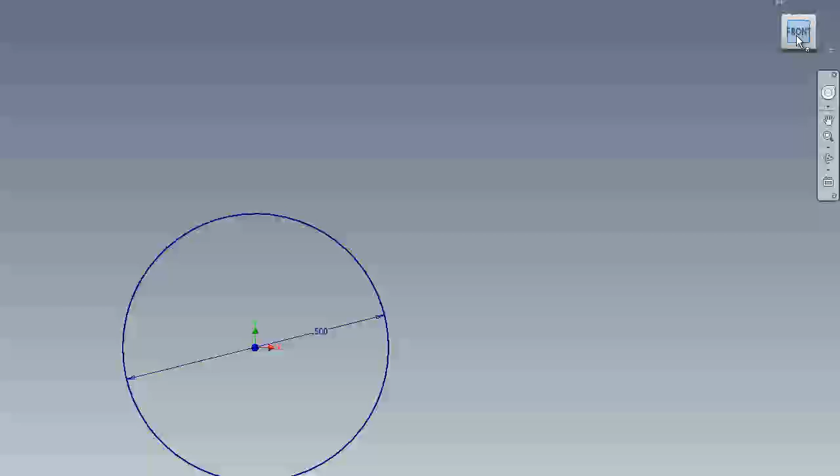First thing I'm going to do is move this. I'm going to right click up here and set that view as my top. Then I'm going to set that view and set it as home.

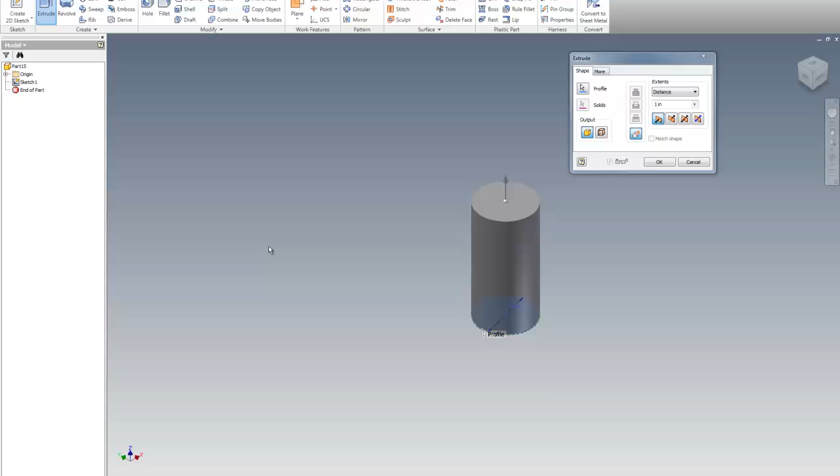So then I'm going to right click and done, right click and finish sketch, and extrude. The amount we're going to extrude is 2.38 minus 0.5 minus 0.12, and I hope that's right.

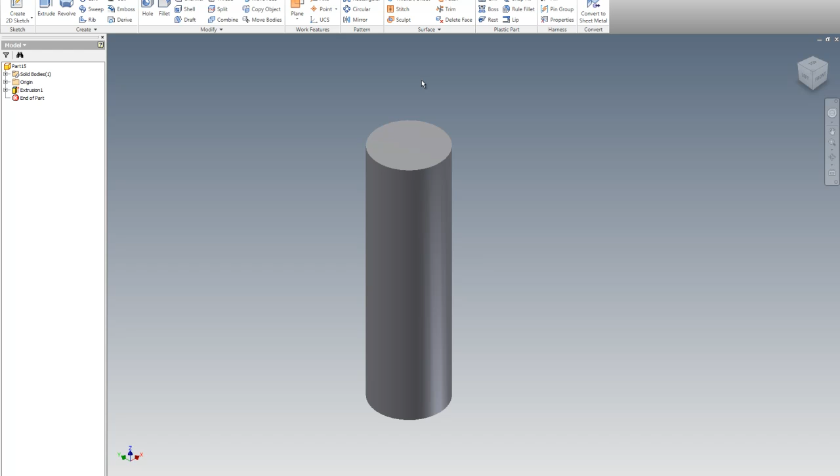Then I'm going to go over here to our origins. I'm going to go to the XZ plane, right click, make it visible. Then the z-axis, make that visible. We're going to right click, new sketch.

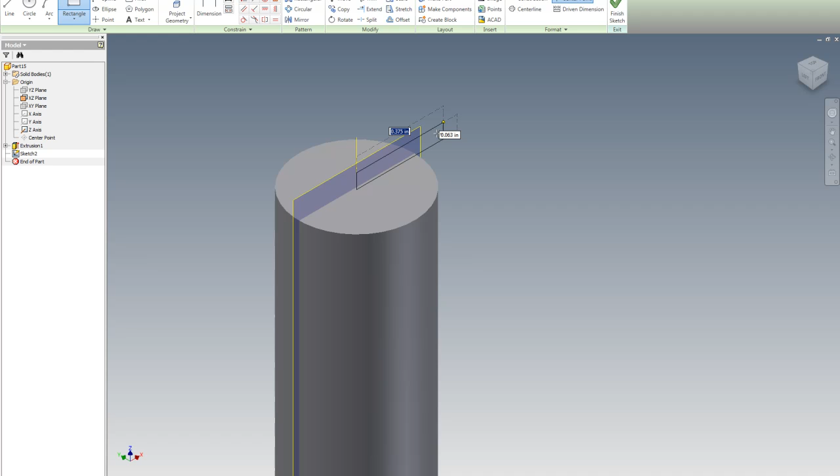We're going to pick this plane right here. Then we'll take this rectangle from that center point, and that is 0.375 tab 0.12. Now notice that it is down.

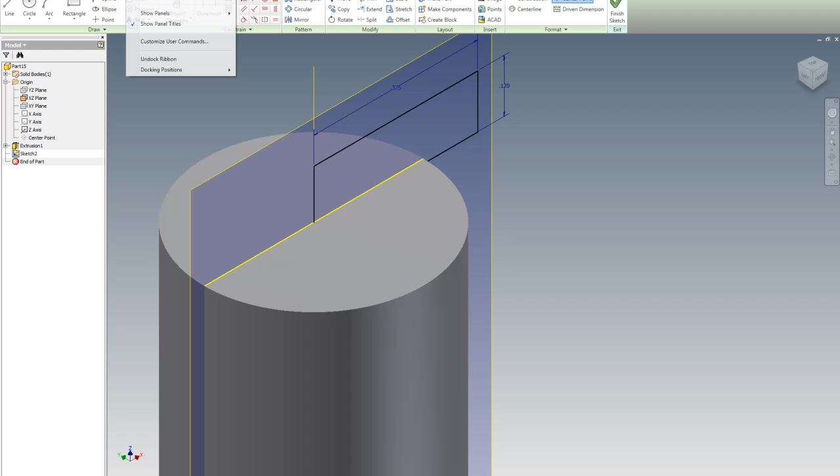So what I'm going to need to do here is project this geometry. Then I'm going to need to move, and I'm going to have to get into my view and go to wireframe to get back here.

Right click, finish sketch. Right click, go back to edit sketch, and go to move. I'm going to select this geometry, pick a base point, pick that point right there, and then bring it up and pick that point right there. And that isn't right where I want it either.

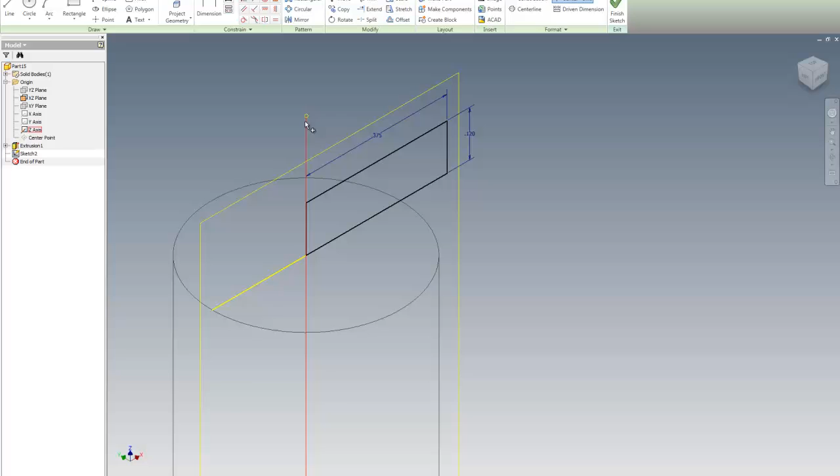So I think I'm going to have to project some more geometry. We'll go one more time, go to move. Select, base point, pick that, and now it'll find that point because I had both of those picked. Done, and just for fun, we are there. Perfect.

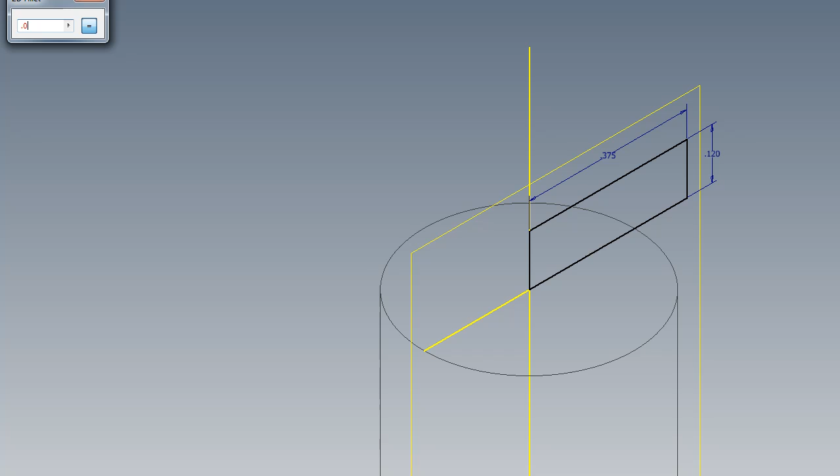Then I'm going to go over here to fillet, and set it to 0.06, enter, pick that and pick that. I just did fillet. Pick, pick, there we go. Pick, pick. Right click, done. Right click, finish.

Revolve, pick that, there's my axis. For fun, let's go see what that looks like. Shaded, there we go.

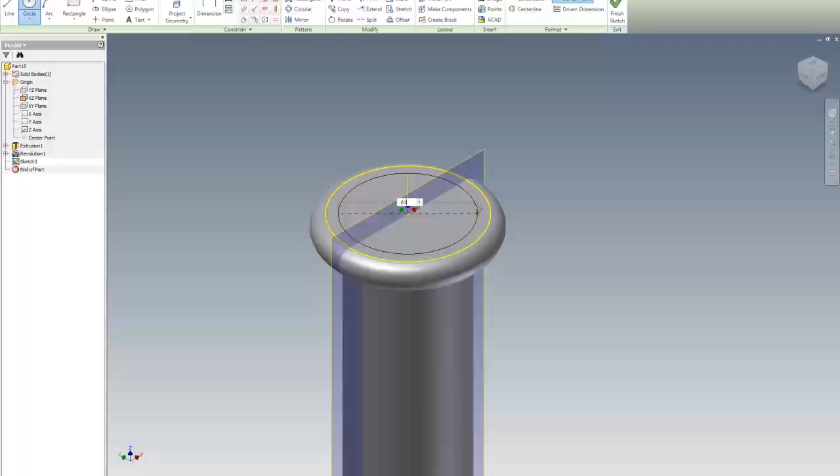Now here's the next part. New sketch, pick this and pick this center, and we are going to make a circle, and the diameter of our circle is going to be 0.619. Finish sketch.

Extrude. We're going to go up 0.5. There we go. Then we're going to go right click, new sketch.

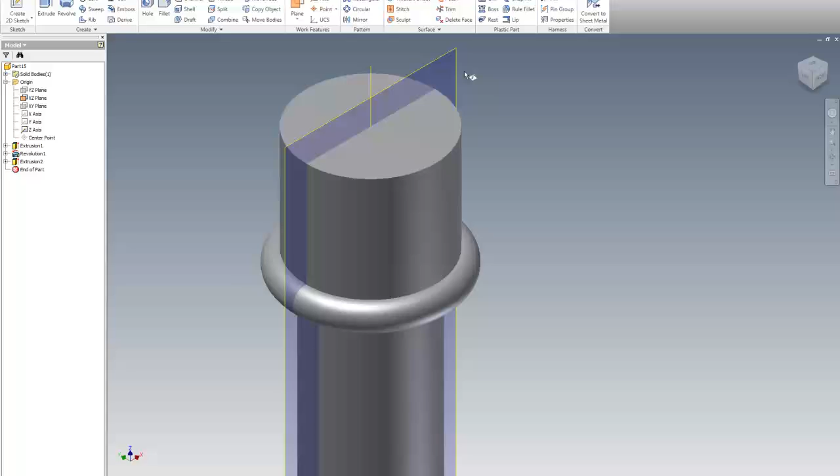Pick this plane. Go to project geometry, pick here, and pick that edge right there. So we have those two edges now.

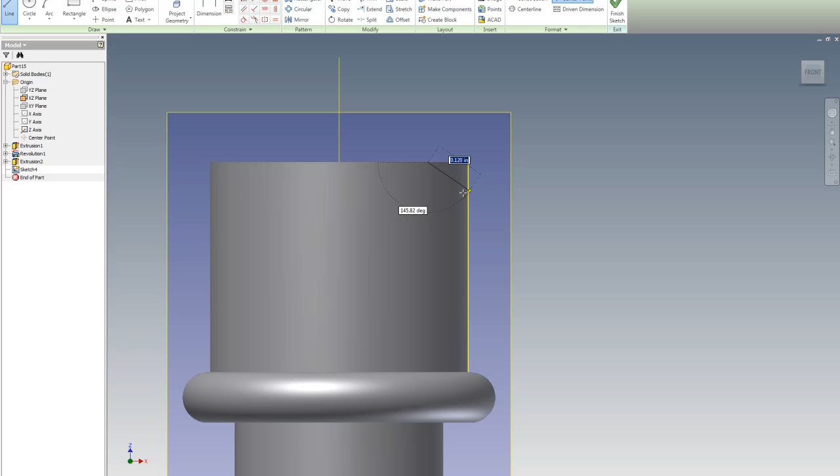We're going to draw a line from a point on that projected geometry to a point on this projected geometry. I'm going to have to go into my view and get those back to wireframe so I can see where the line is. Back to model.

Right click, right click, finish sketch, get back here and here, right click, edit sketch. We have the geometry, I just need to dimension it now.

So I'm going to pick that and that side there, and this distance is critical, 0.0907.

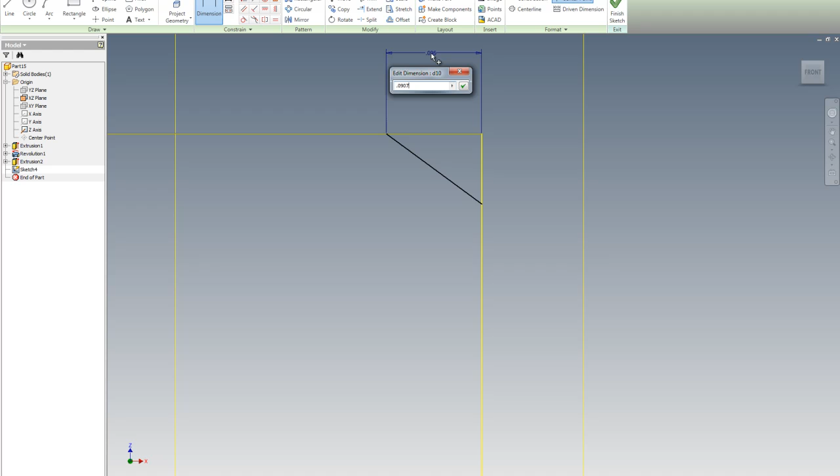Then dimension from here to here, and that's going to be 0.0524. 4 places.

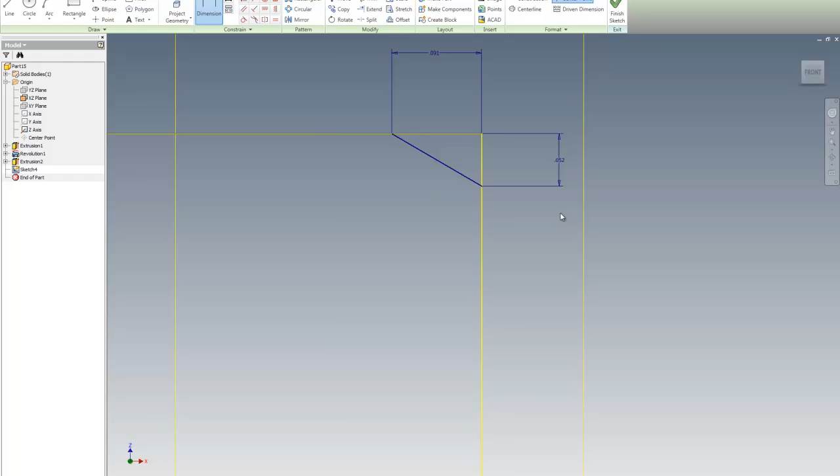Go back up to here, right click, done, right click, finish sketch, go to revolve, there's our profile, there's our axis, do a cut, and go OK. So we've made a chamfer around there.

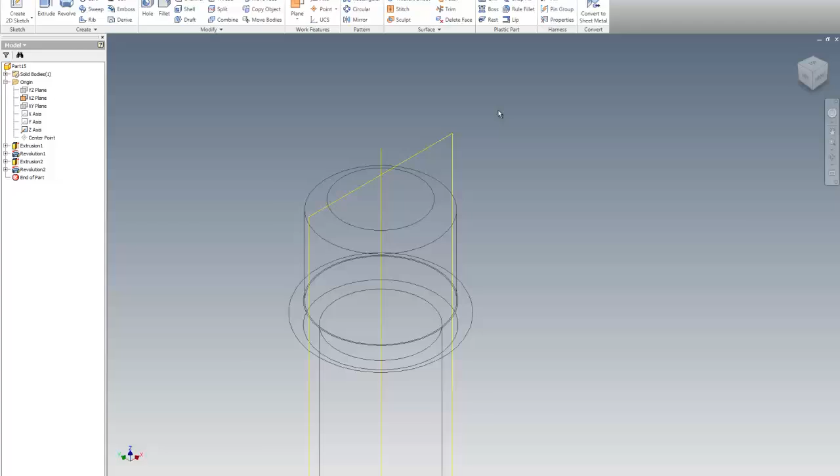Now here comes kind of an interesting part. New sketch, pick the top, project this geometry here, get on top here, create a rectangle, pick an edge on this geometry here, you may not be able to grab it. There I am, okay, and come on over here. Don't grab the edge of the circle though, escape.

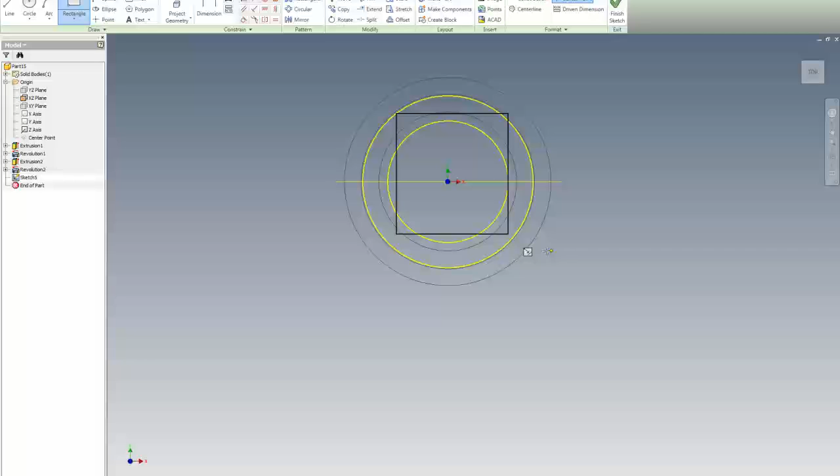Now, dimension this, and that dimension is 0.438. And if we double click on that, it's dimension D13.

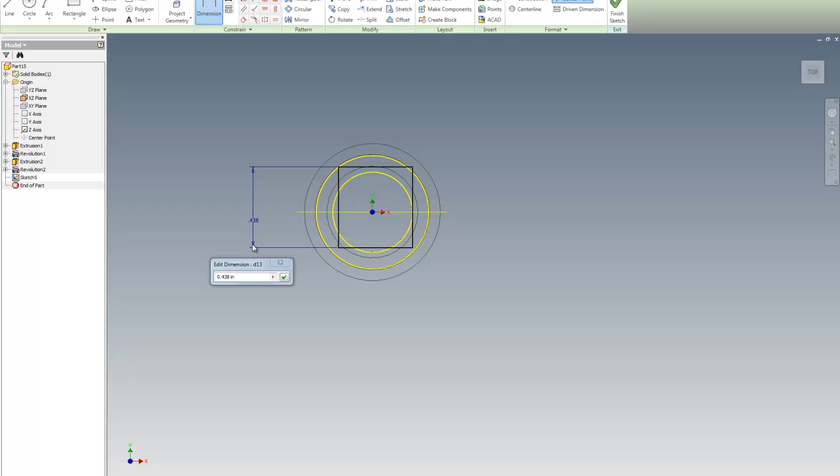I'm going to come over here, pick this, and I'm going to go D13. Then I'm going to go to coincident, and I'm going to pick that corner and that corner, and notice all 4 corners met that edge.

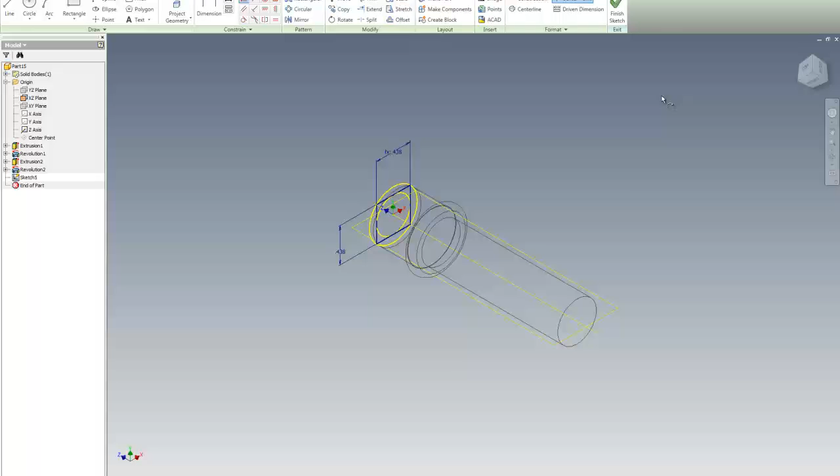Now this is kind of a funny little thing that you're going to do. If you didn't get to see this trick, you would never figure this out. I'm going to grab this and create a box. I don't care how big it is, I just want it to be bigger. Right click, finish sketch.

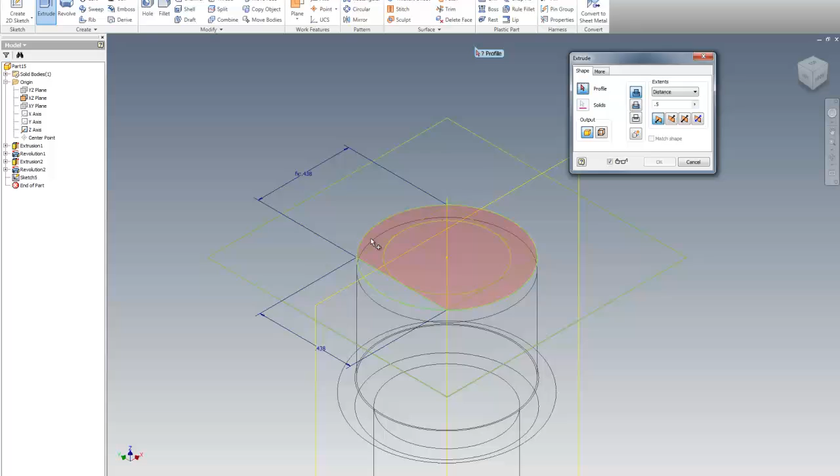Then I'm going to go to extrude, and I'm going to make sure, and I'm going to get on top here, and I'm going to pick this. Then I'm going to sneak in here, and I'm going to have to wait for this. There we go, pick that one.

Okay, and what it is, it's going over here. So there's my problem, I think. That's good there. Okay, I'm going to have to back up a little bit here, I apologize.

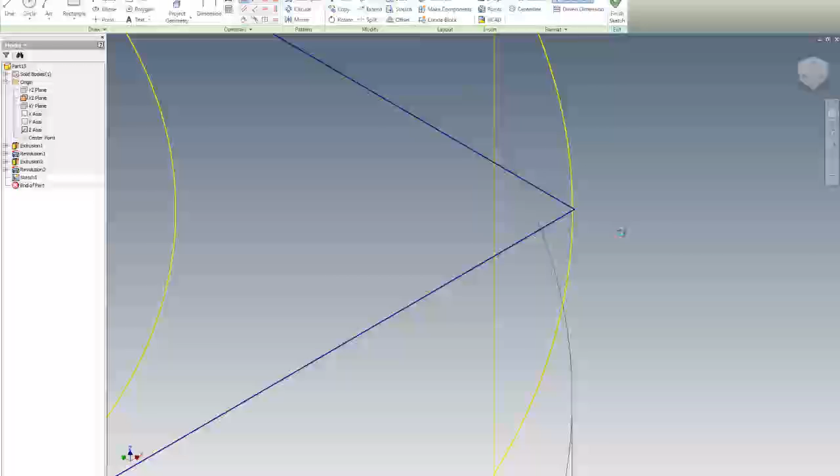Okay, let's back up. Let's see if we can use the coincident to catch this edge here and that edge there, and the coincident to catch this edge and that edge there. Okay, but we've got a problem here because it shouldn't be sticking over the edge, so something isn't quite right.

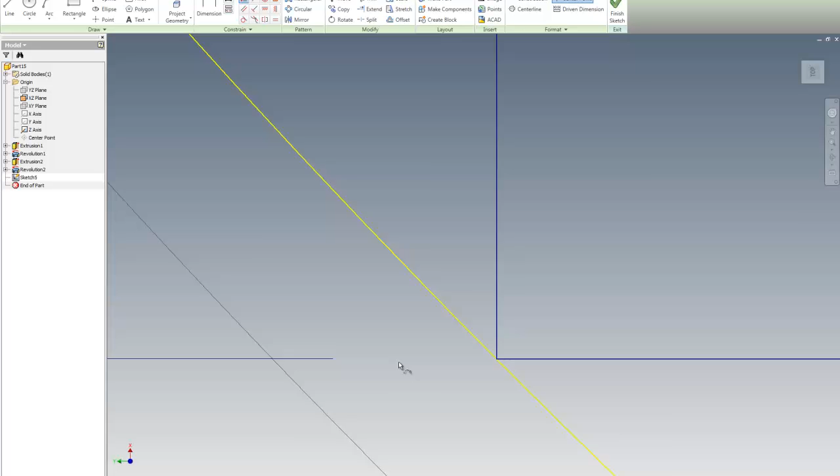Okay, so I'm going to take away this dimension here, and I'm going to go back in here and hit this coincident, picking this point here and the circle. There it is. And there it is. Okay, so I can actually get rid of this one too.

Great, come back into home. Now, so I couldn't dimension those, but I could use the coincident to get the 4 corners to do what I wanted.

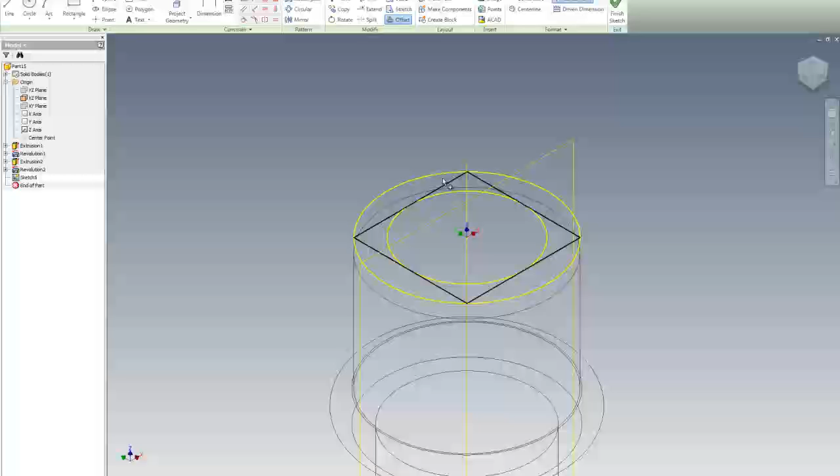Now I'm going to go to offset again. Pick this, come out here, get on top, right click, done. Right click, finish sketch, extrude.

Okay, I am going to pick here, I'm going to pick here, and pick here. So you see what I'm leaving? I'm leaving just the square. And I'm going to extrude it, and I'm going to cut down 1/2 inch. Okay, I'm going to go OK, and look what we just did.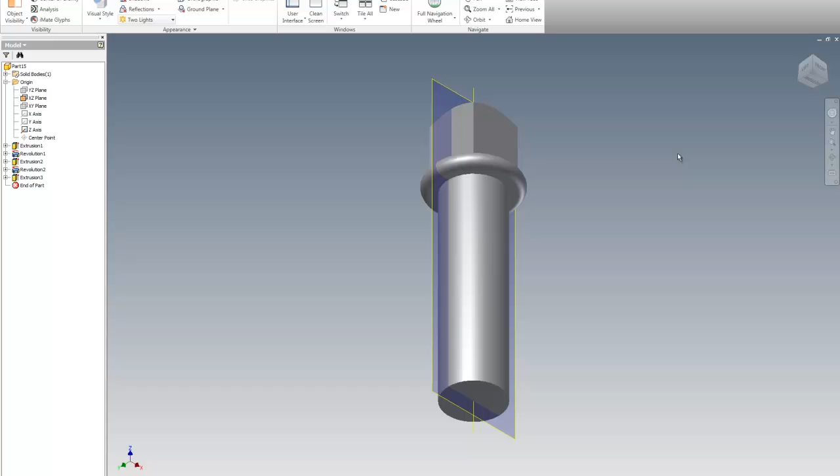Okay, now we're going to come down here. Okay, and we're going to go to the front here. I'm again going back into View, go back into Wireframe. Okay, I'm going to right-click, New Sketch. I'm going to pick this here. Okay, I'm going to project geometry, which is I'm going to pick this and this.

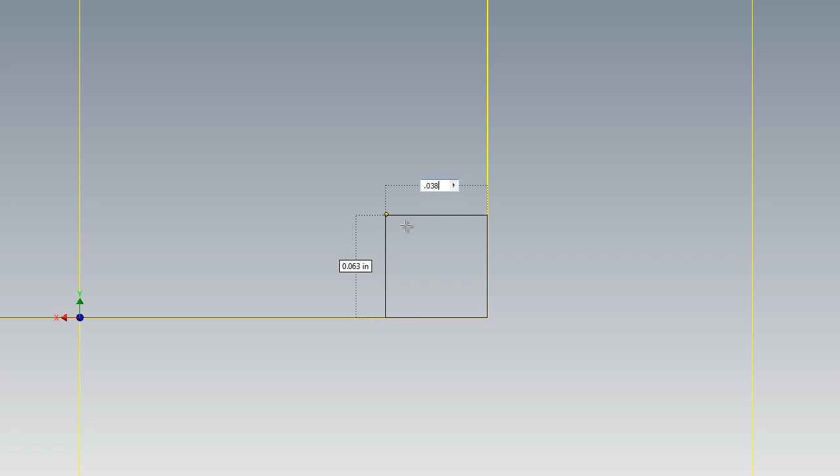Okay, I'm going to come in here and make a little tiny rectangle, starting on that corner there. Come on now. Okay, rectangle. There we go. And it looks like 0.038 by 0.13. Okay, so 0.038 tab 0.13.

Okay, right click, finish sketch, go up to model, revolve, pick my center point, do a cut, and OK.

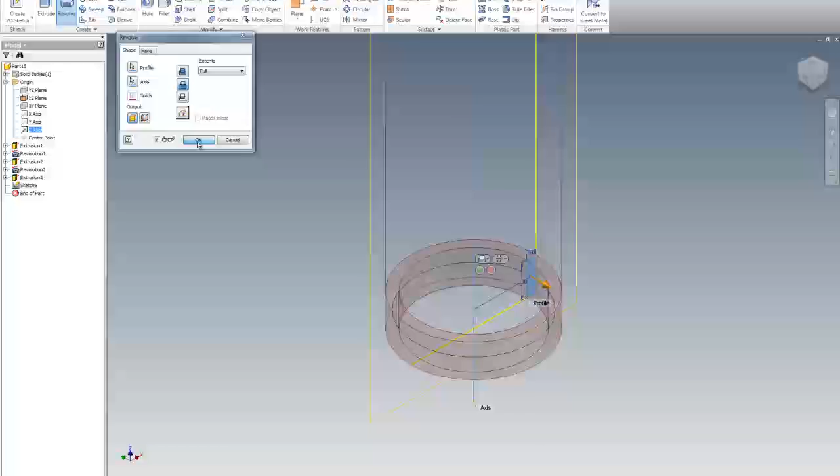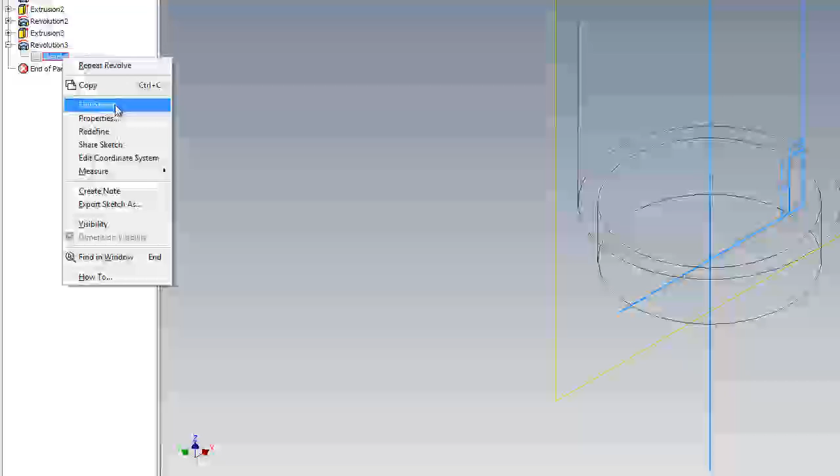Then let me go back to that. I want to double check my dimensions here. Edit sketch. 0.038. 0.038. So that is 0.13 is the height. Okay.

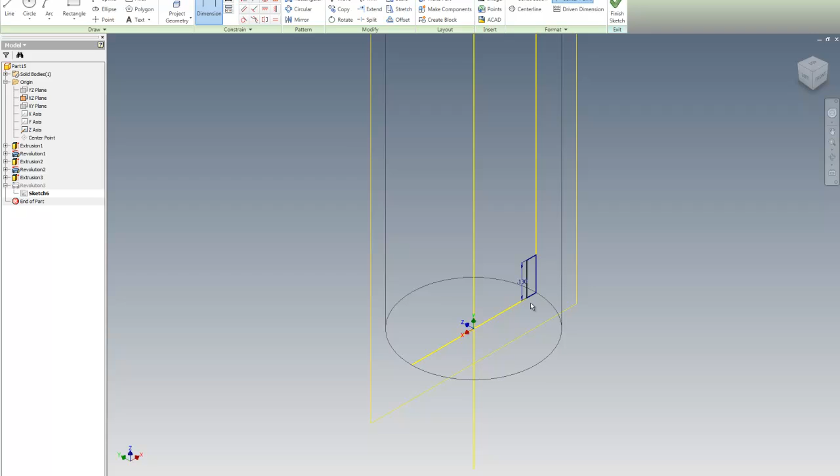Oh, this wants to be 3/8 of an inch diameter. So let's take this and we'll dimension it this way, on the front here. And we're going to need to project the center geometry, the axis. Now I can pick that, and I can come over here and pick that, and put down 0.38 divided by 2. There we go. Okay, and that's what that wants to be, 0.38 divided by 2.

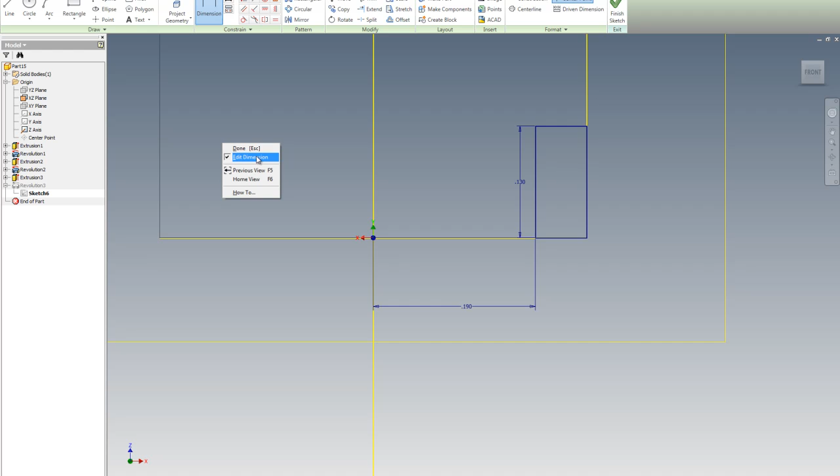And done, and finish sketch, and it cut it out. Now we'll flip down on the bottom. Okay, it's always good to check. Always good to check. Okay, and we have a chamfer, and we have a 0.0312.

So we're going to go to chamfer. Going to go to this 0.0312, 45. Okay, and I don't know which is my right face here. There we go. So, pick that.

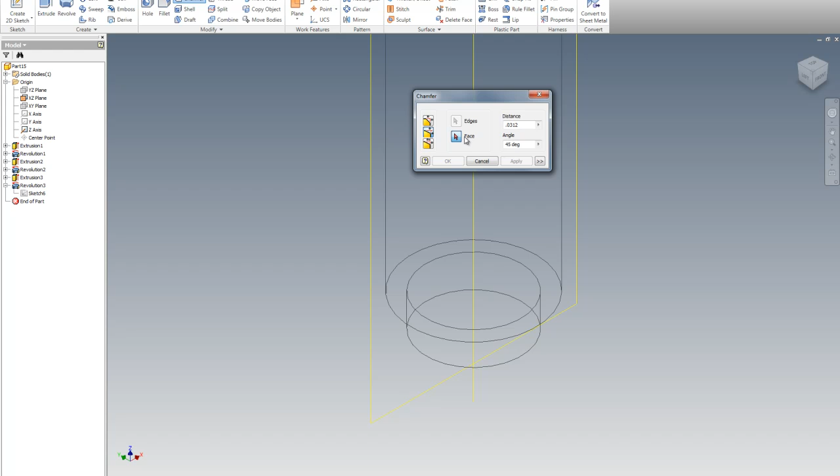Oop, there's the bottom. Okay, pick that. Pick the edge. Pick the face, which is that. There we go. And now pick the edge, which is that. There we go.

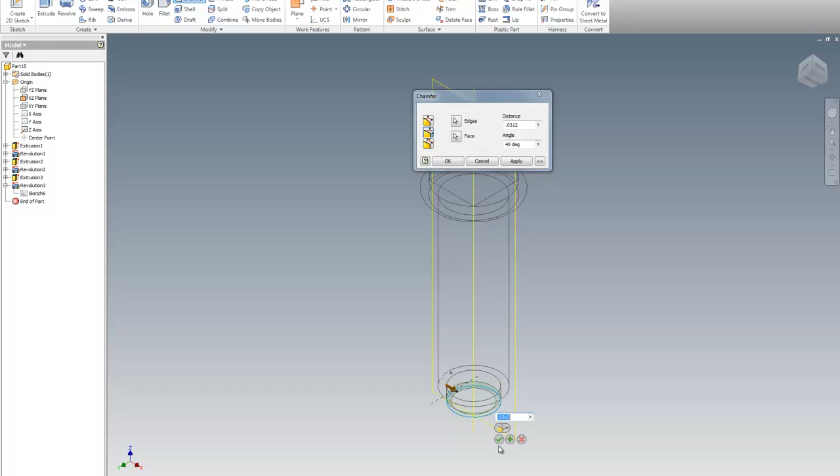It's one of those things where the 3D flips on you and you can't tell which way it's going. Okay, I believe that's all I need for there. Okay, let's get back into our view and get back into our shaded. Okay, great. Okay, I'm happy with that.

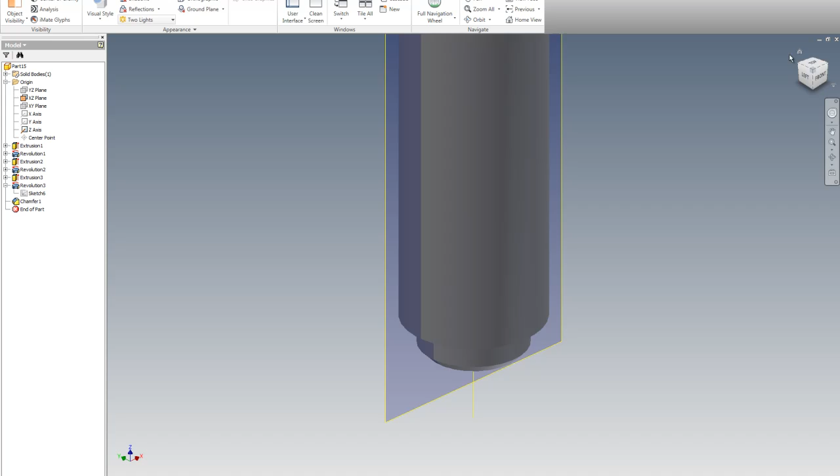Okay, and then looks like we got a thread over here. So we're going to go up to thread. We're going to pick this shaft, and it is the whole length. Okay, and we're going to go check our specifications, and it's 1/2 by 13, and that is correct.

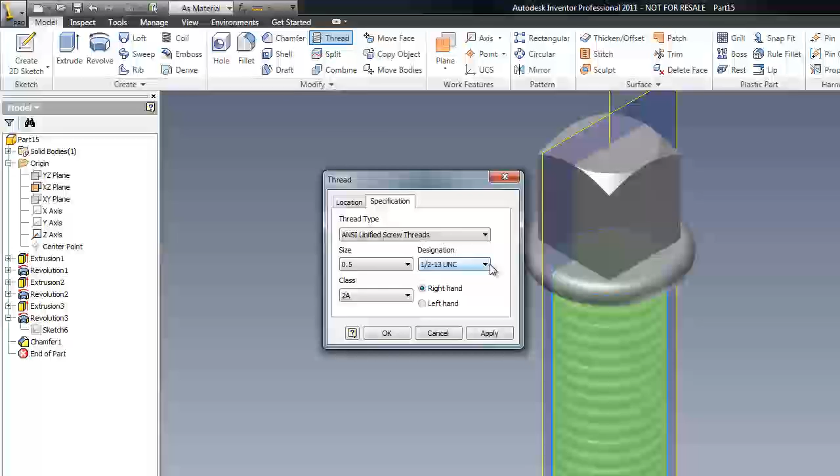Okay. Oh no, it's 7/16 by 14. Okay, so that means that my diameter is wrong. Okay, so we got to go back to our original extrusion, and we're going to go to Edit Sketch. Okay, and we're going to go 7/16.

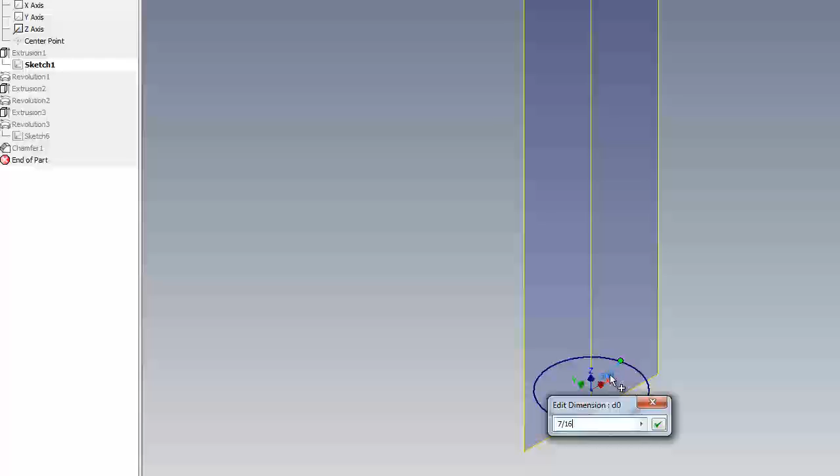Okay, and finish sketch. Okay, and now thread, and we'll check our specifications. 7/16 is 14, that is correct. It wants to be 2A. Okay, and apply, and let's take a look and see how that looks.

Okay, that looks really good. I'm going to give it a cool material. I'm going to come over here and give it some kind of a, what do we got here? What do we got in the metal? We got machined, we got metal, stainless, titanium polished. That looks good. I like that, titanium polished.

Pretty nice. Okay, now if you want to get rid of these things, you just right-click them and take the visibility away. And there you go, there is our bolt. And I'm going to do this again. I'm going to make 2 of these because it's quite the process. So, okay.